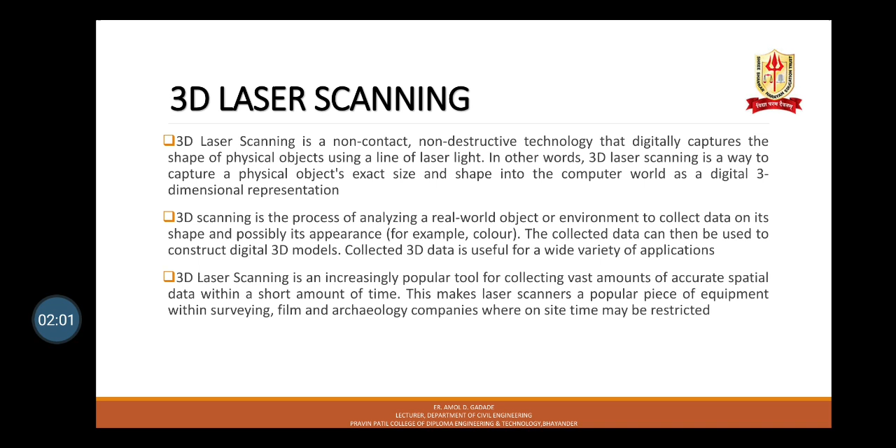Some indoor applications of laser levels include leveling floors, easily checking the height of doors and windows, aligning shelves, cabinets, etc., and measuring distances between objects. Some outdoor applications of laser levels include basic surveying, site layout, checking the elevation of land, and plumbing.

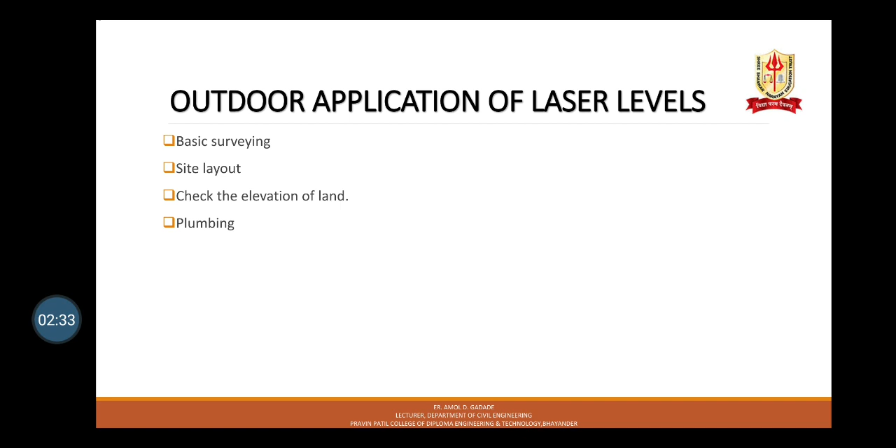Laser levels were designed to speed up the setting up process in the workplace. Using this device is quick, easy and reliable. The accuracy over a long distance is far superior to that of a simple spirit level, which is suitable for shorter distances but will give less accurate results for longer distance leveling.

Here are some laser level accessories. First one is the tripod. These are useful tools to have in the laser level world. It can help to provide a level footing, making results more accurate. Laser line detector. These tools work alongside the laser level and can provide acoustic or optical signals that make it easier to find laser lines. Batteries. Strong rechargeable batteries are beneficial, especially if the laser level will be going on site. Some batteries offer up to 2-day continuous operation.

Chargers. Laser level batteries are rechargeable, so it is essential to carry a charger to make sure you can use it on site. Remote control. These products will allow you to adjust settings such as rotational speed, auto leveling, manual leveling, etc. remotely. And leveling staffs, which range from E-type, barcoded, standard INVAR, and industrial INVAR. There are many leveling staffs to choose from to assist you with leveling. Our NEDO fiberglass leveling staff is especially sturdy and durable and is ideal for leveling close to power lines and railways.

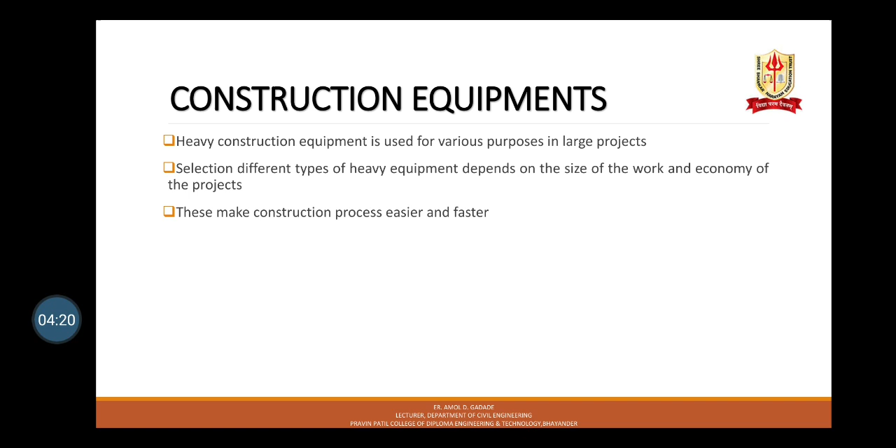Talking about construction equipment, the second part of this chapter: heavy construction equipment is used for various purposes in large projects. Selection of different types of heavy equipment depends on the size of the work and economy of the project. This makes the construction process easier and faster.

So starting with earth moving equipment. Earth moving equipment is heavy equipment, typically heavy duty vehicles designed for construction operations which involve earthwork. They are used to move large amounts of earth to dig foundations or for landscaping and so on. 6 types of earth moving equipment are available in the market.

Very first one is the excavator. Excavators can be utilized over wheels or treads and are used most often to shovel dirt or lift heavy pieces of machinery. Backhoe loaders, bulldozers, skid steer loaders, motor graders, and trenchers. An excavating machine is any machine, usually self powered, that is used in digging or earth moving operations of some kind. The power shovel, bulldozer, and grader are examples of excavators.

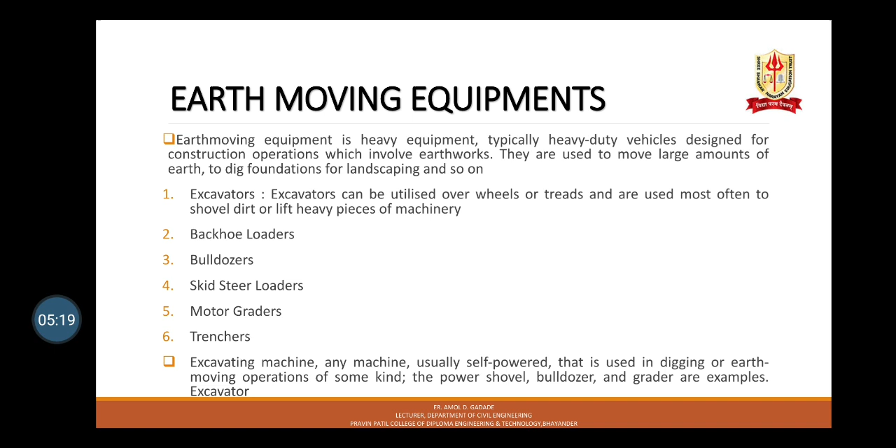So let us start with skid steer and crawler loaders. Skid steer loaders are among the most versatile machines available in the construction industry. They are small and nimble and can turn within their own footprint, just like a tank, making them ideal for work in confined spaces or in areas where construction activity has been finalized.

Skid steer loaders are wheel driven and often offer good traction in snow and mud. The wheels also minimize soil compaction and damage to finished areas. These handy loaders come in a few different sizes and can be outfitted with a variety of attachments to perform digging, drilling, compacting, log grappling, snow blowing, jackhammering, and other tasks. As the name suggests, these are tire mounted small size machines which can skid on their own axis and therefore are highly applicable in space constrained construction sites.

The tread pattern used in their tires ensures that they have minimal impact on finished construction sites and that they limit soil compaction. These machines provide a good grip on snow as well as mud. Most skid steer loaders commonly available in the market can be retrofitted with different attachments and can be used for a wide range of applications such as moving mud or snow, excavation work, compacting soil, drilling holes, lifting loads, etc.

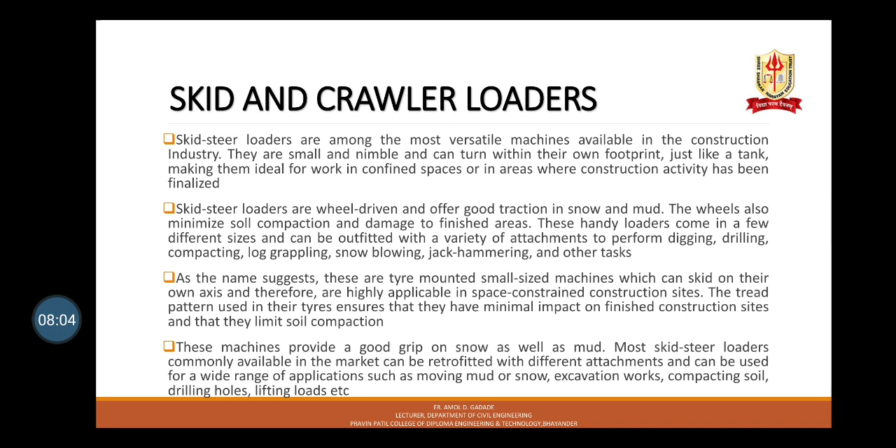Loaders are used in construction sites to load the material onto dumpers, trucks, etc. The materials may be excavated soil, demolition waste, raw material, etc. A loader contains a large size bucket at its front with a shorter moving arm. Loaders may be either tracked or wheeled. Wheeled loaders are widely used in sites, while tracked or crawler loaders are used in sites where wheeled vehicles cannot reach.

Next one is trencher. Trenchers are the earth moving machines which are used for digging trenches, typically to be used for piping, cabling, or drainage purposes. The material that has been dug up is deposited beside the trench by the conveyor system of the trencher. Different types of trenchers are available which vary according to their applicability, construction requirement, or the sturdiness of the surface to be trenched. Trenchers generally are mounted either on tracks or on wheels.

Trenchers or trenching machines are used to excavate trenches in soil. These trenches are generally used for pipeline laying, cable, drainage purposes, etc. Trenching machines are available in two types, namely chain trenchers and wheel trenchers. Chain trenchers contain a fixed long arm around which a digging chain is provided. Wheel trenchers contain a metal wheel with digging teeth around it to excavate hard soil layers. Wheel trenchers are more suitable. Both types of trenchers are available in tracked as well as wheeled vehicle forms.

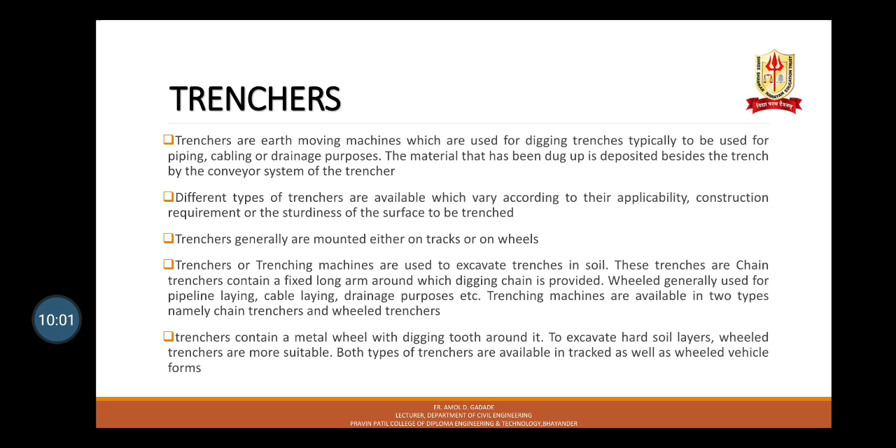True to its name, a trencher is used to dig trenches, usually narrow trenches for piping and cabling. Trenchers come in many different types and sizes, from small walk-behind versions to very large trenching machines that can cut into asphalt pavement and other hard surfaces. The trencher has a conveyor system that carries the excavated material and deposits it onto the ground next to the trench. Trenchers can use different digging implements depending on the depth of the trench and material being excavated.

Next one is scraper. A scraper can move dirt and aggregate quickly around a construction site and is used primarily for digging and leveling large areas of land. Scrapers are very large heavy equipment designed for open areas where they can run at high speed for cut and fill operations. Large self-propelled scrapers are called motor scrapers. There are also smaller scrapers called pulled scrapers that are pulled behind other vehicles.

On any construction site, you will see a wide variety of heavy equipment, and one of the largest is the scraper. While some machines you see on site, such as bulldozers and backhoes, tell you just what they are designed to do by their appearance, the scraper with the upfront cab pulling a large wagon does not give anything away. Within that large heavy wagon section of any scraper is a gated front with a blade at the bottom. With the gate open, the blade scrapes up material as the machine moves forward, forcing the excavated material into the wagon itself until it is filled. The gate is then closed and the scraper can transport that material away to be disposed of. If you imagine a carpenter's plane shaving wood, that is the best way to describe how a scraper operates.

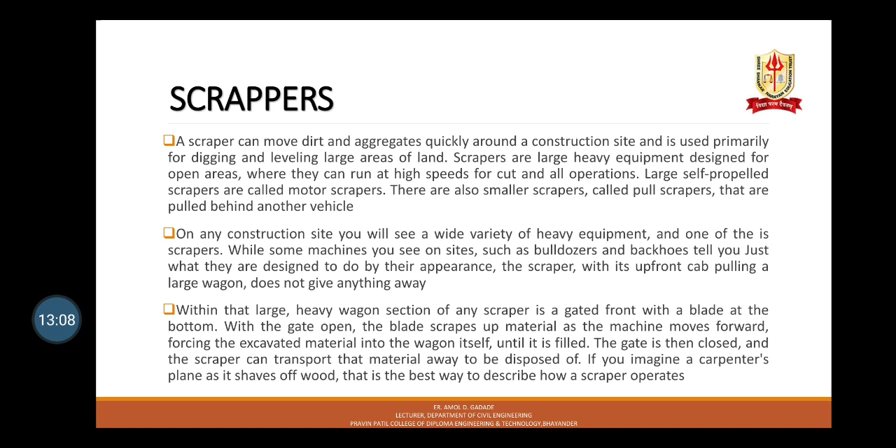When the hopper is lowered, the front edge cuts into the soil or clay like a plane and fills the hopper. When the hopper is full, it is raised and closed with the vertical blade known as the apron. The scraper can transport its load to the fill area where the blade is raised and the back panel of the hopper, or the ejector, is hydraulically pushed forward and the load tumbles out.

So talking about configuration, it has open bowl, usually requiring a push cat bulldozer or similar to assist in loading. Second one is elevating scraper, self loading, as it uses an elevator to load material, requires no push cat. Tandem scraper, separate tractor and scraper engine provides better traction in steep or slippery areas. A push cat is required except when loading loose materials.

Tandem push pull concentrates the combined horsepower of two such machines onto one cutting edge. The push pull attachment allows two individual scrapers to act as a self loading system, typically loading both machines in less than a minute, one after the other. Auger uses a vertically mounted auger in the bowl to pull material upward, and last one is pull type scraper, which uses an agricultural tractor, articulated dump truck or bulldozer to pull. Pull type scrapers can be utilized individually or 2 or 3 units can be pulled behind a single tractor.

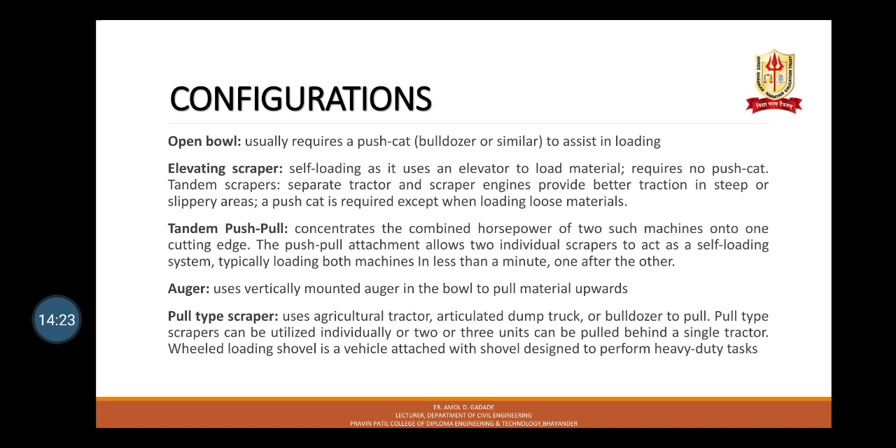Our next vehicle is wheel loading shovel. Wheel loading shovel is a vehicle attached with shovel designed to perform heavy duty tasks in earthwork and in construction operations. This shovel has specific capabilities to accomplish the loading task depending upon various sizes, tasks and design requirements. This wheel loader is furnished as skid steer, payloader, bucket loader, skip loader, and wheel loader.

It is used to transfer material from one place to another. It is equipped with a front mounted bucket which is supported by boom structure. For lifting, it loads the material into the bucket by forward motion of the machine. After lifting the material, it transports the materials to its respective destination.

The growth of the wheeled loading shovels market is driven by innovations and development in construction equipment market. However, high cost of wheel loading shovels machinery as compared to other loading machinery hinders the market growth. On the contrary, rapid growth in the construction and mining sector in Asia Pacific region, specifically in countries such as China and India, due to favorable government investment and economic growth, is expected to offer lucrative opportunities for the market.

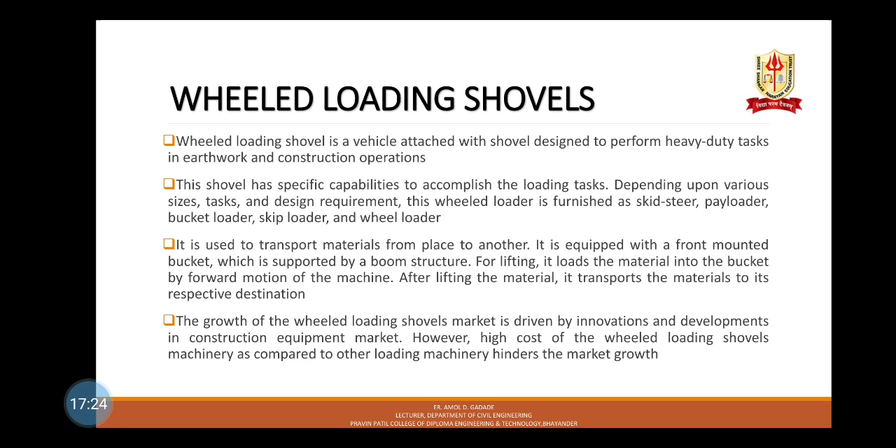The key benefits are: the study provides an in-depth analysis of the global wheel loading shovel industry along with the current and future trends to elucidate imminent investment pockets. information about key drivers, restraints, opportunities, and their impact analysis on the market has been provided. Porter's five forces analysis illustrates the potency of buyers and suppliers that operate in the industry. The quantitative analysis of global wheel loading shovel market from 2017 to 2025 has been provided to determine the market potential.

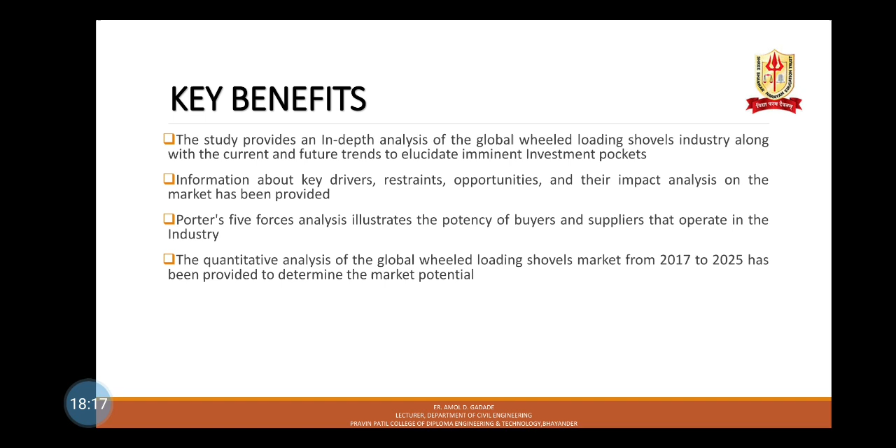Next is the advanced plastering machine. General description of the project is given as quick plastering of wall automatically by pumping the cement mix from funnel and plastering it on wall in vertical and horizontal movement using microcontroller by controlling the stepper motor. It is cost effective and reduces human effort.

The cement mix, which is poured in a funnel, is pumped using centrifugal pump to a hopper. Inside the hopper there will be a gear pump which pumps the cement mix as an output to wall through the cylinder slit. The cement mix which comes out will be captured by the metal plate and it forcibly sticks to the wall. The cement mix will be punched by metal plate using roller. The stuck cement mix will also be smoothed using metal plate and rollers.

To make this an automation, we interface the sensors to detect cement flow, the stepper motor for the movement of the header unit in rail guides, and the AC motor to control the flow with microcontroller. Here we can give the vertical and horizontal distances as the input for the movement of header.

Advanced plastering machine: this innovative machine is unique and perhaps one of a kind automated plastering machinery, ideally suitable for the construction building industry. It works with conventional cement mortar, which brings it to a smooth, flat finish with variable and adjustable thickness to suit each application. It can plaster the wall automatically by moving up and down in vertical direction.

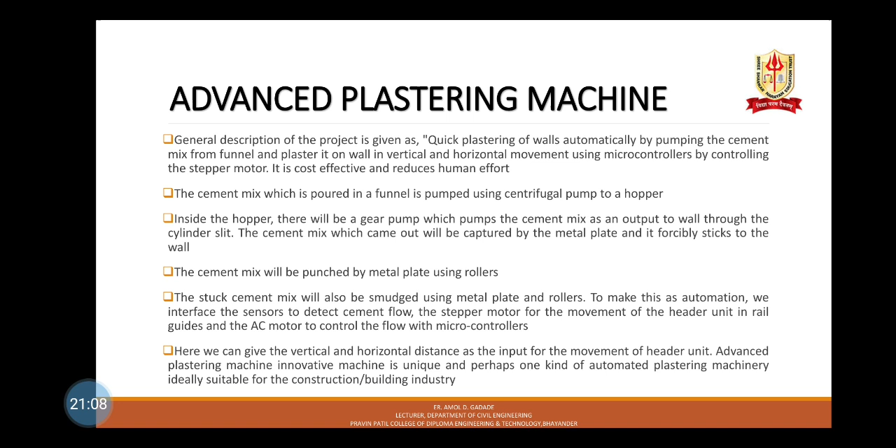It has a microcontroller for controlling the motor to automatically control cement flow and the automatic movement of the hopper for cement discharge plastering. It is easy to operate, one or two persons can operate it, easy to move without removing any parts of the machine, and there are wheels under the machine for easy movement.

Here are applications. Automated plastering machine is unique and perhaps one of a kind automated plastering machinery ideally suitable for the construction and building industry. It works with conventional cement mortar, which brings it to a smooth flat finish with variable and adjustable thickness to suit each application. Automated plastering machine makes rendering easier, faster and effortless as compared to manual application.

This idea can also be further enhanced by interfacing an LCD display and keypad for making the process without external source. This time and money saving machine keeps up with the ever changing world of building automation.

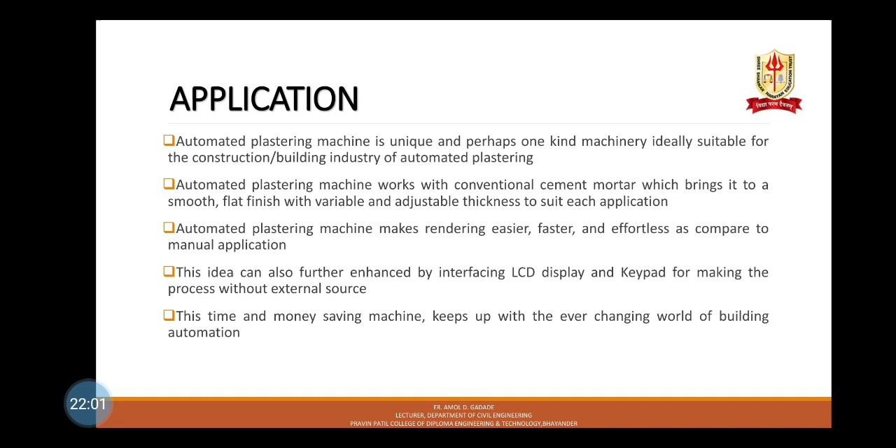Next one is bridge launcher. The bridge launcher is the equipment that places the preformed beam onto the prefabricated pier. The bridge machine belongs to the crane category because its main function is to lift the beam and then transport it to the position and then put it down, but it is very different from the general sense of crane. The requirement of the harsh condition and the existence of the beam on the line, or called vertical shift.

So, application range of this bridge launcher. The bridge launcher is designed for highway and railway. According to the situation of present railway, with less upgrade, more bridges and tunnels were connected closely. Our company designed and manufactured the new box girder bridge launcher with double girder. It is mainly used for hoisting concrete girders in bridge construction of general railway and highway.

So here are some major features and advantages. According to the user's demand, the new type bridge girder erection machine integrates carrying with erecting in its design. The feature is the machine can accomplish girder carrying and erecting at the same time. The machine can erect 4 pieces of girder with another 2 cranes in one day, saving construction cycle.

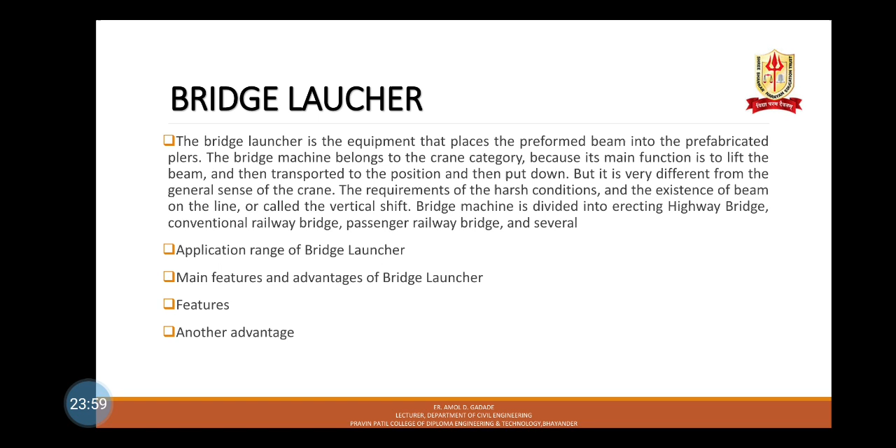And another advantage is if the concrete girder is between the two piers, just exchange the front and rear legs. It can continue to work, no extra assembly, shortening construction period.

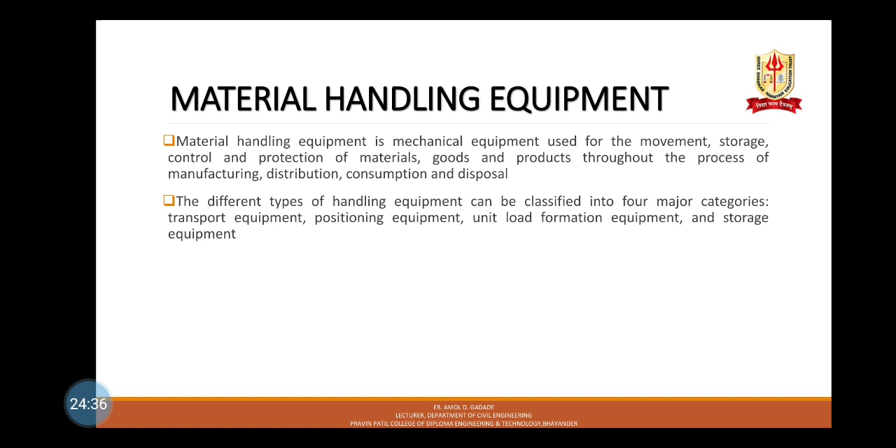Next type of equipment, that is the third part of this chapter, is material handling equipment. Material handling equipment is mechanical equipment used for movement, storage, control and protection of materials, goods and products throughout the process of manufacturing, distribution, consumption and disposal. The different types of handling equipment can be classified into 4 major categories: transport equipment, positioning equipment, unit load formation equipment and storage equipment. So let us start with cranes.

A wide range of different types of cranes can be used for construction projects as a means for lifting and moving materials and other building elements from place to place. Cranes can range from a simple rope pulley to a tower crane fixed to the top of a skyscraper. A launching gantry is a special purpose mobile gantry crane used in bridge construction. It is used to install precast box girders in highway and high speed rail bridges. A launching gantry is described also by other terms including beam launcher, girder launcher, bridge building crane, and bridge building machine.

A crane is a type of machine generally equipped with a hoist rope, wire ropes or chains, and sheaves that can be used both to lift and lower materials and to move them horizontally. It is mainly used for lifting heavy things and transporting them to other places.

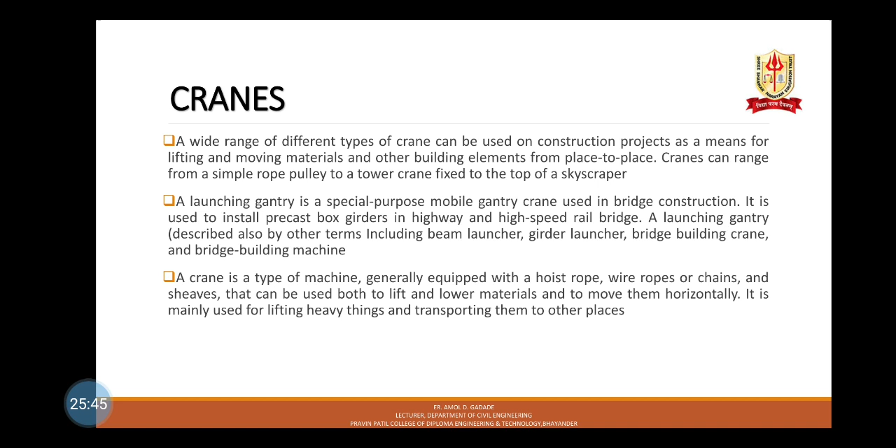The choice of crane for a particular site will depend on a number of different factors, including types of load that need to be lifted, the height and horizontal distance that need to be covered, the radius of the swing, the time period of the lifting operation, the utilization factor, the degree of mobility required, and the type of plant that will be used in conjunction with the crane. Cranes can be classified as mobile cranes, static cranes, and tower cranes.

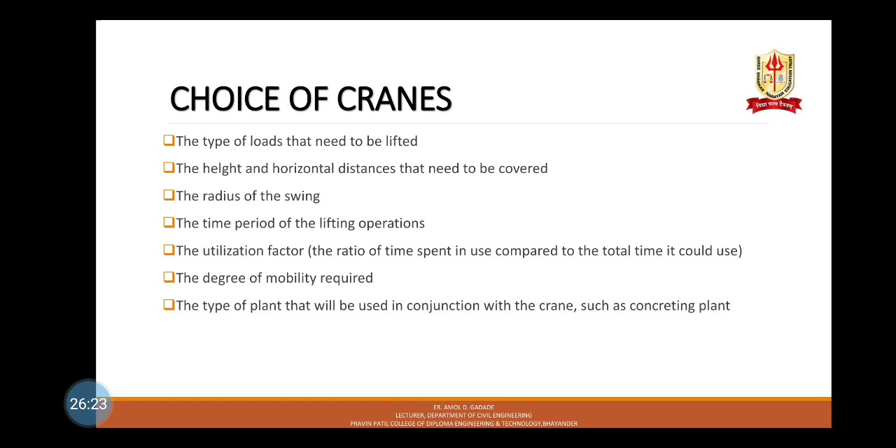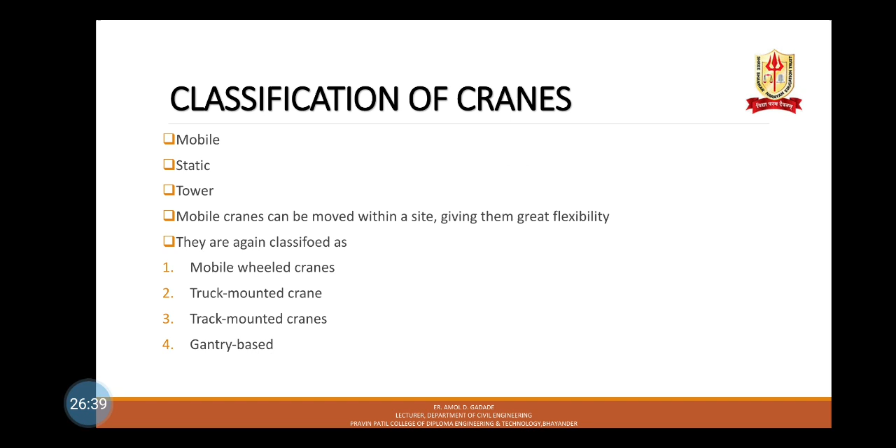So starting with mobile cranes. Mobile cranes can be moved within the site, giving them great flexibility. They can be either mobile wheel, truck mounted, track mounted, or gantry based. So let us start with mobile wheel cranes. Mobile wheel cranes are mounted on a wheel chassis with stabilizers that can be used when lifting to prevent movement. Generally, the crane is controlled and driven by the operator inside the cab.

The slewing ring beneath the cab allows for a 360-degree turning circle, and the booms extend upward supported by suspension ropes. Lifting capacity tends to vary from 3 to 50 tons, generally around 10 tons. Speed limits apply depending on the type of vehicle and road. Mobile wheeled cranes are commonly used for moving moderately heavy loads, equipment, and other plant in goods yards or storage areas. Next are truck mounted cranes.

Truck mounted cranes are mounted on a truck or lorry specially adapted to carry an increased load. The lorry can be driven from the front cab as a conventional vehicle, as well as having additional control for a lattice mast or telescopic boom which extends in sections. A fly jib attachment can be used to increase lifting height.

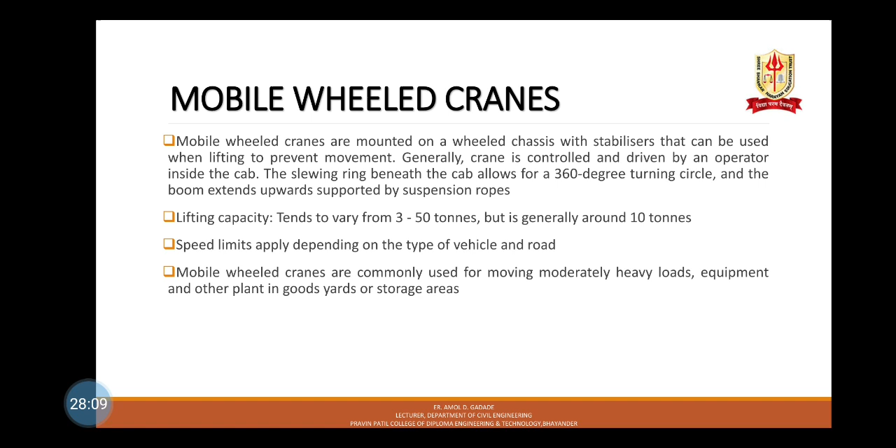Lifting capacity can vary from 5 to 2000 tons, generally 35 to 100 tons being used. Speed limits apply depending upon the type of vehicle and road. This type of crane is very transportable and has a short site preparation time. They are commonly used for short hire periods. Next are track mounted cranes.

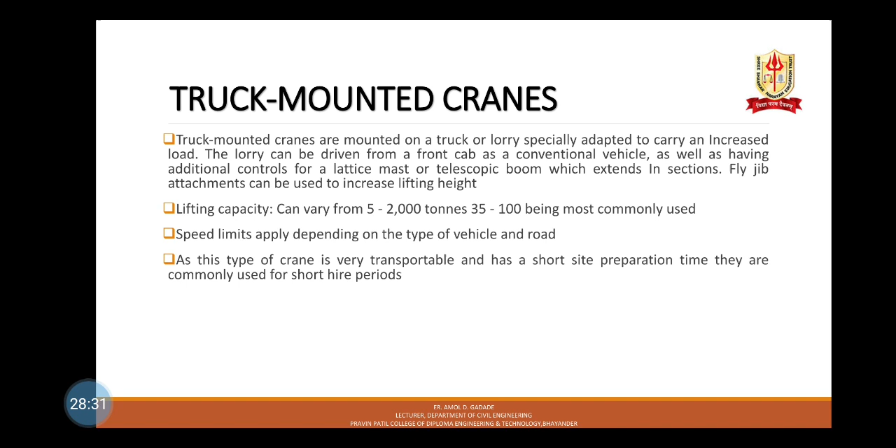These are track mounted cranes. Track mounted cranes are mounted on a diesel powered crawler unit together with a lattice mast that can accommodate a fly jib attachment with additional lifting ropes to allow for better site coverage. They can move at low speed around site but need to be transported to and rigged on site.

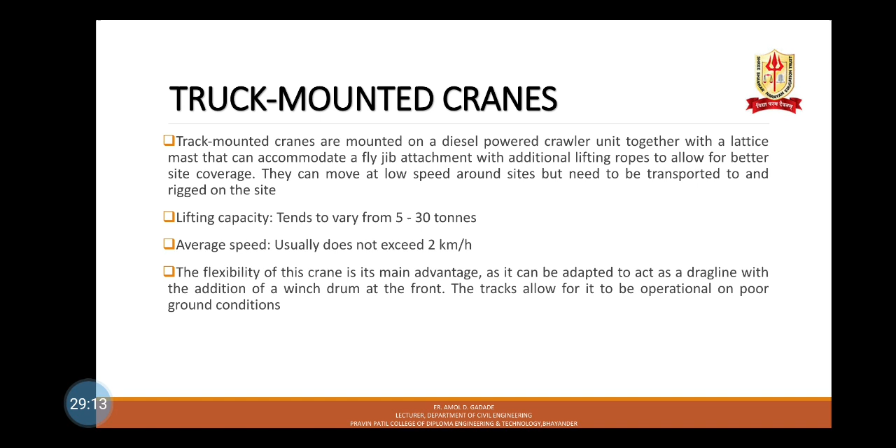Lifting capacity is 5 to 30 tons. Average speed usually does not exceed 2 km per hour. The flexibility of this crane is the main advantage, as it can be adapted to act as a drag line with the addition of a winch drum at the front. Next one is the gantry crane, also known as portal crane.

Gantry cranes typically consist of two A-frames connected by a lattice cross member which straddles the work area. The lifting gear is suspended from the horizontal cross member and can move along it on rails. On small gantry cranes, the A-frame is wheel mounted, whereas larger cranes are mounted on powered bogies that run on rail tracks. Larger cranes tend to have the lifting gear mounted with a driving cab on the cross member.

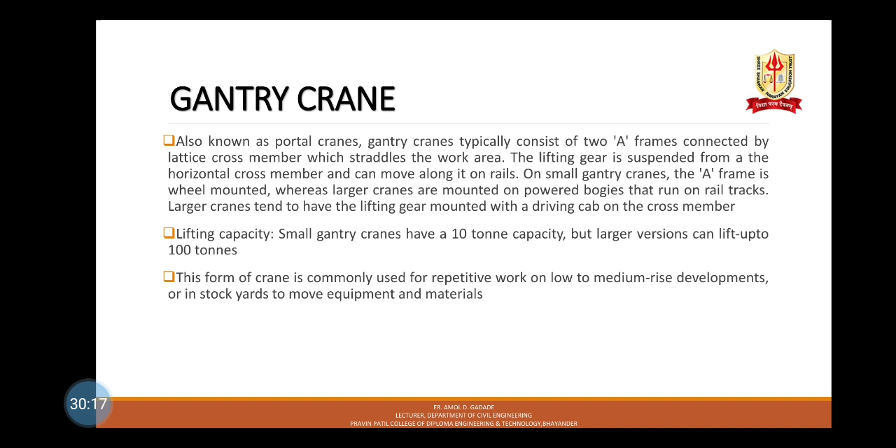Then lifting capacity: small gantry cranes have 10 ton capacity, but larger versions can lift up to 100 tons. This form of crane is commonly used for repetitive work on low to medium rise developments or in stock yards to move equipment and materials.

Static cranes: despite having a similar appearance to the traditional tower crane, static cranes differ in that the lattice mast is mounted on the slewing ring, meaning that the whole tower rotates from one fixed position. They are fitted with a luffing jib which can be raised through 90 degrees from horizontal, with a trolley and the hoist block that can move along the length of the jib.

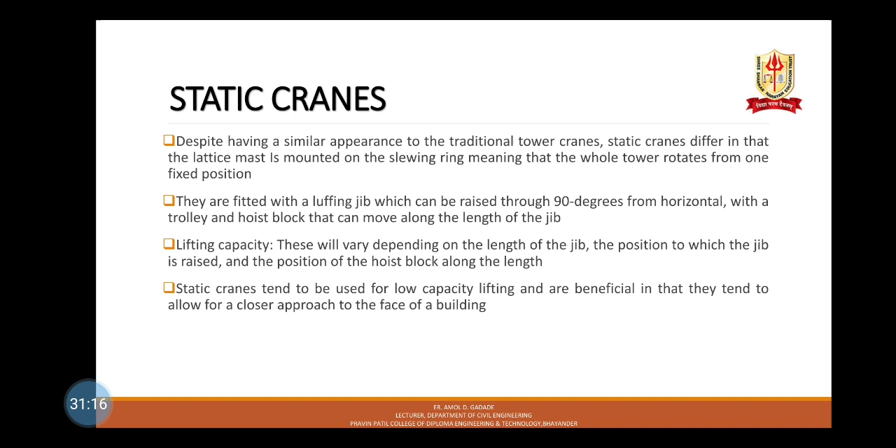Lifting capacity will depend upon the length of the jib, the position to which the jib is raised, and the position of the hoist block along the length. Static cranes tend to be used for low capacity lifting and are beneficial in that they tend to allow for a closer approach to the face of a building. And last one is the tower crane.

Tower cranes are a familiar sight on most construction projects. Tower crane operators are capable of seeing most of the lifting operation from the cab, although a banksman is required at ground level both for overseeing the loading of the crane and for issuing signals and guidance to the operator. They are usually assembled and erected on site with a horizontal or luffing jib.

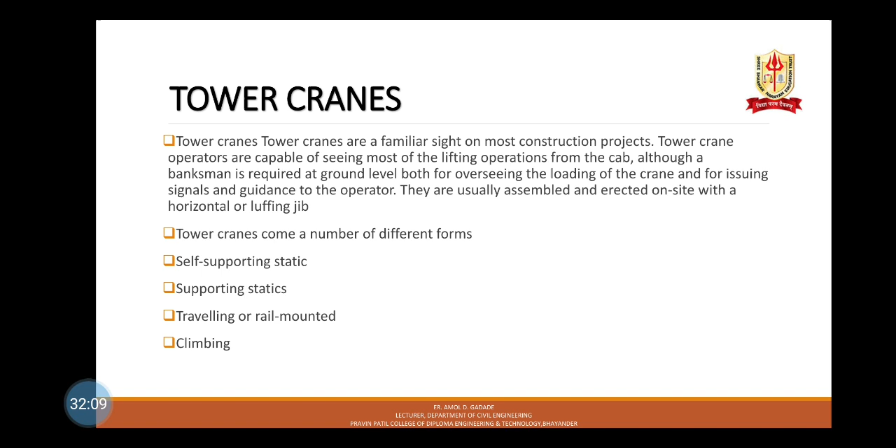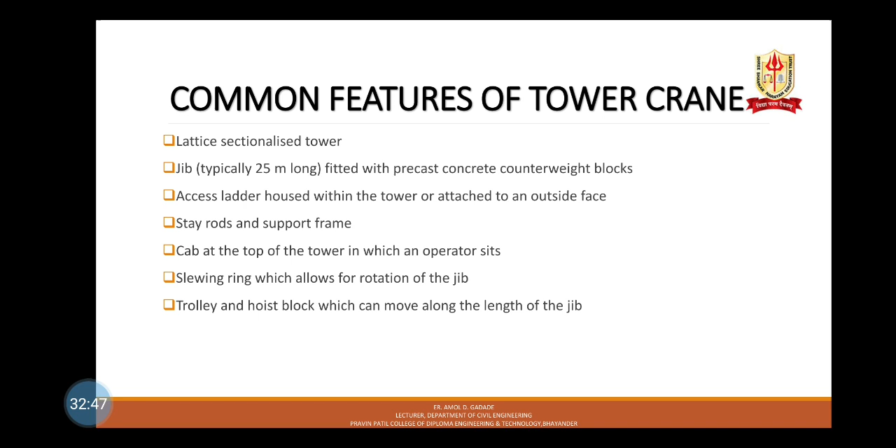Common features of a tower crane are a lattice sectionalized tower, a jib which is typically 25 meters long fitted with precast concrete counterweight blocks, an access ladder housed within the tower or attached to an outside face, stay rods and support frame, a cab at the top of the tower in which an operator sits, a slewing ring which allows the rotation of the jib, and trolleys and hoist block which can move along the length of the jib. Tower cranes come in a number of different forms: self-supporting static, supported static, traveling or rail mounted, and climbing.